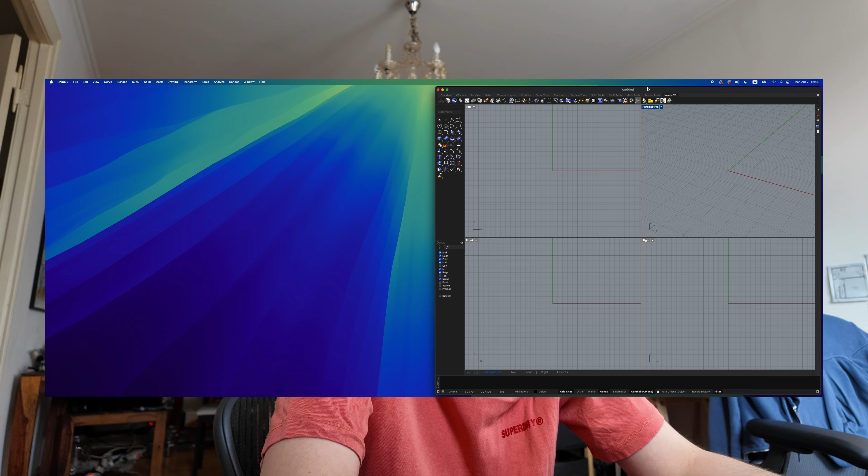The first thing you have to do when using Rhino 3D is create a new model, which will open a new file with 4 windows. Now, I personally don't like to work on 4 windows at once—some people might just use it to inspect different angles of the object. But to get into one single window, you just click maximize, and then you have a single window.

Now there are 2 things to remember in Rhino. It's very simple: with Fusion 360, you draw things usually on a sketch. Here you draw things using polylines. So I can, for example, draw a rectangle. Well, first let me show you what a polyline is. Here I can draw a polyline.

Now, you can bring the polyline into any direction, but if you hold Shift, it's going to try to go at 90-degree angles. I want a box, and before I create this box, I need to know what dimensions I need.

So let's quickly go measure the dimensions of my kitchen drawer and see how big I want my bin to be. I don't want the bin to be longer than 1 drawer, so I want to be able to open up the drawer below the kitchen bin without a problem.

So I need to measure out the height of the drawer, and I need to see how wide the doors are on my kitchen counter. My drawer is 195 tall, so maximum 190-ish. The width doesn't really matter—I can make that the maximum that my printer will do. So let's go.

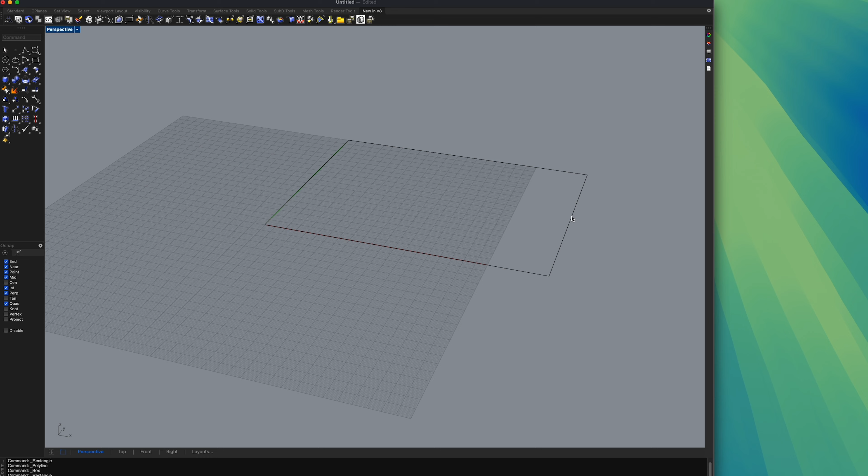On Rhino 3D, to create this object, I can do either a rectangle, which is 250 by 200. Then I just get a rectangle. I can click on it and type in extrude curve. Now I am extruding this curve and creating a three-dimensional box.

Now I need to decide the height, which was 195. So I'm going to type in, to give some tolerance of 5 millimeters, 190. Now this is my kitchen bin's shape.

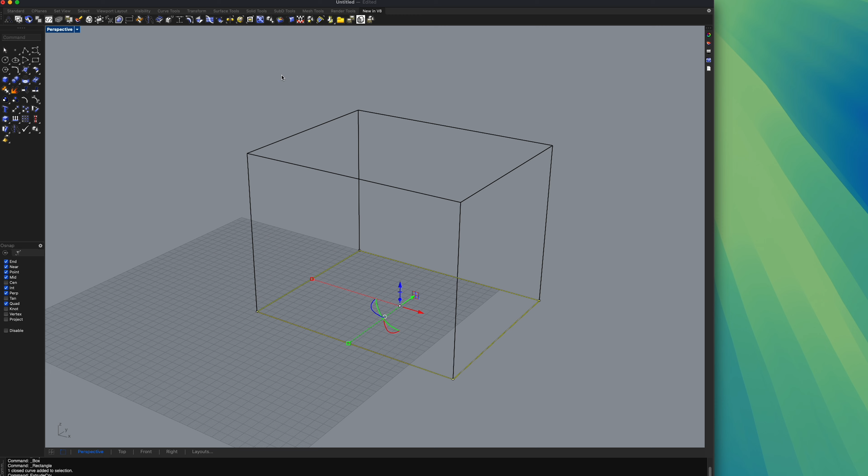As you can see, it's see-through, so if you want it shaded, you can press shaded. This is what it should look like - this is the box and this is the line. You're working with lines that you're drawing and extruding. You can also click onto box, type in 250 by 200, and extrude it by 190, and it would do the exact same thing.

So let's continue working with our shape. Now that I have this box, I need to decide what the wall thickness of my object should be. Usually in 3D printing, anything below 1.5 millimeters of wall thickness is not very sturdy. I usually go with one line being 0.3 millimeters.

If you want some tolerance, 0.3 millimeters is generally a good tolerance to get one line of thickness less, and it will definitely give you enough space between objects so that things can fit into each other and so on and so forth. Now, what I want here is a very strong wall because I don't want my kitchen bin to break.

I have in the past printed it with 1.5 millimeters and that lasted for over half a year, but I will be printing it today with some stronger filament than PLA and I want stronger walls. So I want to use 2 millimeters, maybe even 2.3 millimeter walls to have some very chunky walls.

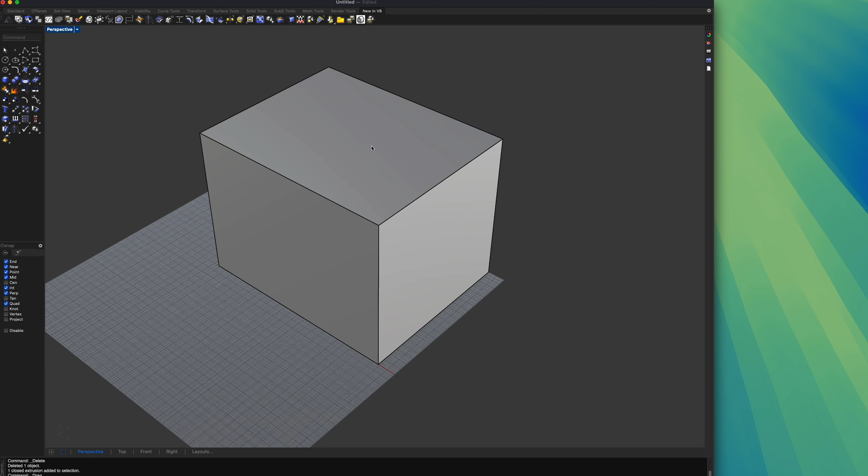So now this is how I can create a hollowed out object in Rhino 3D. This command is almost the same in Fusion 360. Most of these commands are in fact almost the same in Fusion 360.

So what I do in Rhino is I type in shell. Every time I type in a command, up here you can see a window of all other possible commands. I want the shell command, so I'll use that. Rhino makes it much easier to find everything because you just type it in and it's there.

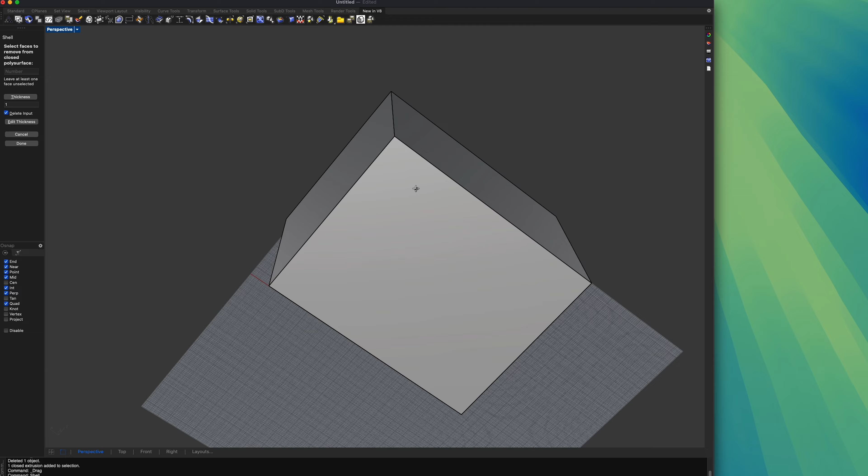So, shell. Now I choose which side I want to shell. I could, for example, shell this front side and this side. Now that would create a tunnel that goes through - as you can see, that's a tunnel. But that's not what I want.

I want a bin. So I type in shell and over here you can see the thickness of the shell. As I mentioned before, I want 2.3 millimeters thickness. So I type in 2.3 over here.

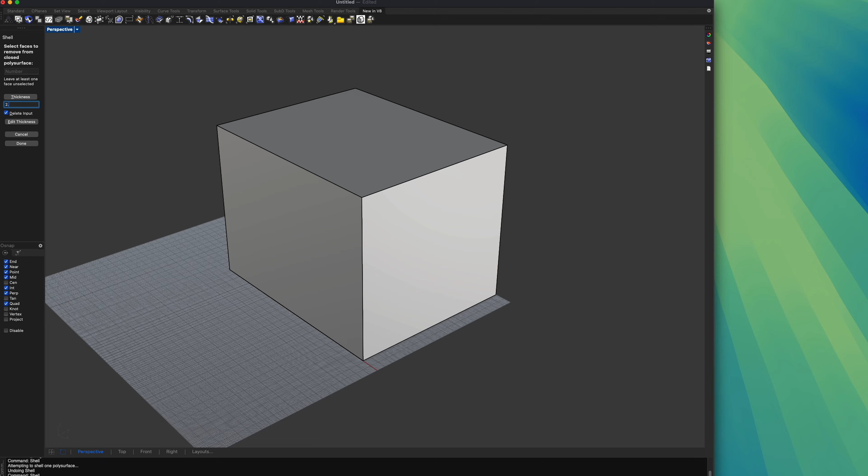Now I decide what side I want to have as the opening - and this is my opening. If I press enter, it will create me a nice box with 2.3 millimeter walls on each side. So enter. There you go.

This is very nice, I like this a lot, but I want to make the design a little bit nicer, so I'm going to round off the edges. Let me go back before I shelled it, because rounding off the edges after I shelled it can cause issues. Let me show you what issues.

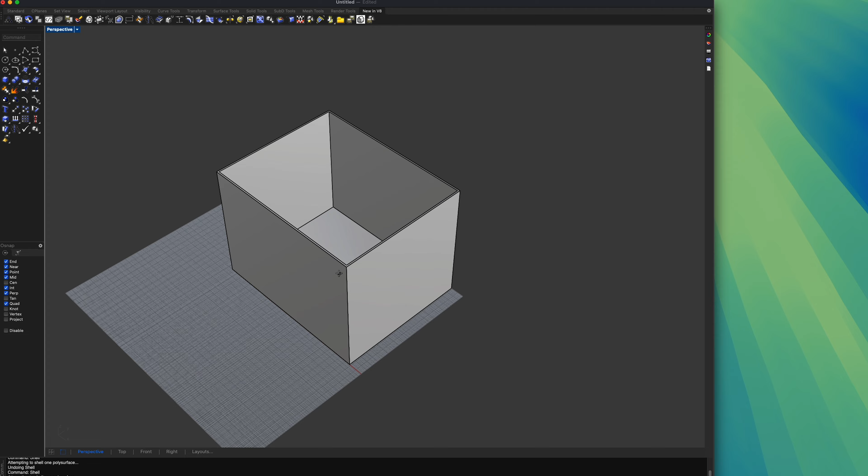So you type in fillet edge to round off the edges, and I want to fillet my edge by 10 millimeters, which will give me a 10 millimeter curve radius. If I fillet this edge, for example, this side will try to go through this area, and you don't want this filleted edge to go into a negative space.

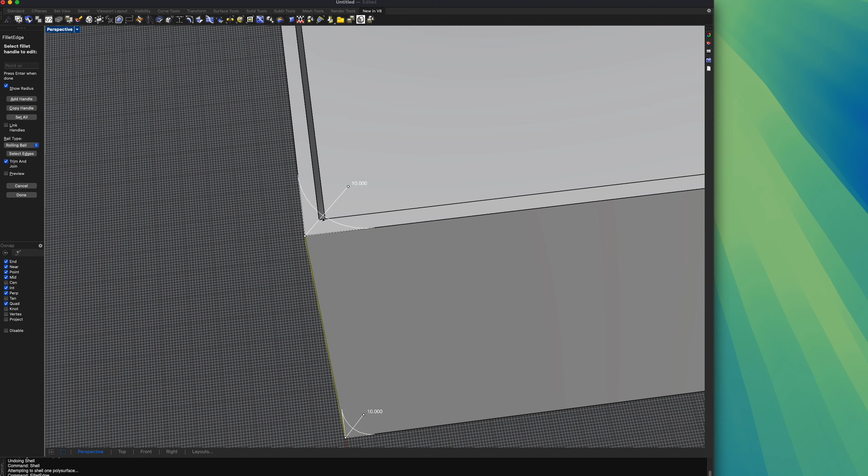You want it always to be solid, so you want some gap to stay here. The only way I could fillet this is by filleting both sides, because now you can see there's a nice line that can fill out like this. But the way I prefer to do it is fillet the edge before. So now I'm back to the beginning.

I didn't shell it yet. Now I can fillet the edge and play around with the shape a bit. I want the back to just be straight because you don't usually see the back, so maybe there's a little fillet of like 4 or something.

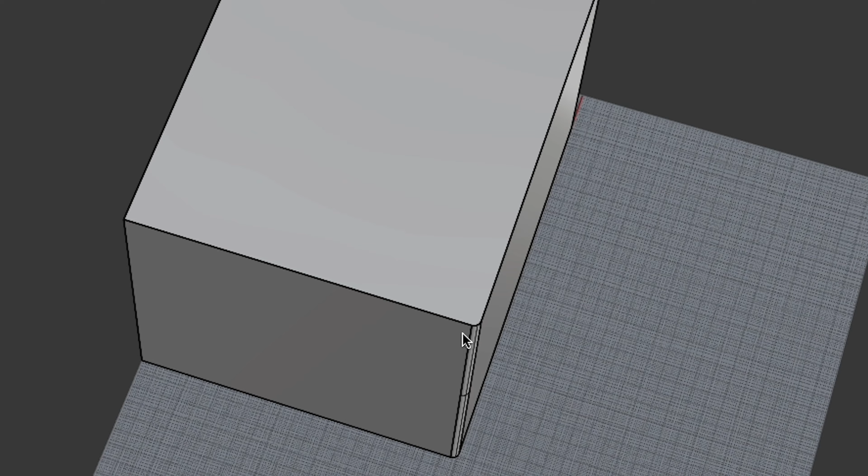This side will be facing the counter, like over here is the counter. Now here I want a big rounded edge because I think it will look nice when you walk by and there's a rounded edge. So I do fillet edge 10. I think this fillet is too small, so I'll do fillet edge 20. There, that looks pretty nice.

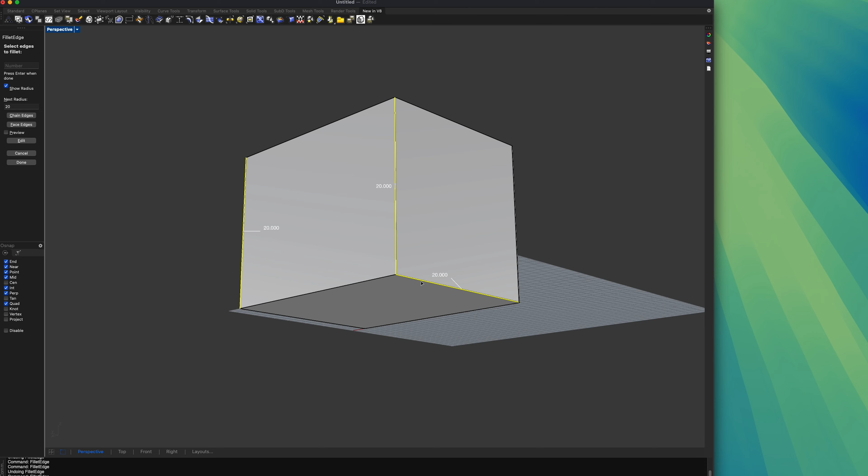Now, one thing we want to make sure is we don't want to fillet these edges, because remember this is 3D printing and you want the bottom to be as flat as possible. If I fillet these edges, well first this doesn't work because I filleted this little piece, but if I fillet these edges, this might look nice to you, but it's not 3D printable because this overhang is greater than 50 degrees and it just cannot print in mid-air. It's going to fall due to gravity. So if you wanted this sort of shape, you would have to chamfer the edges and not fillet the edges.

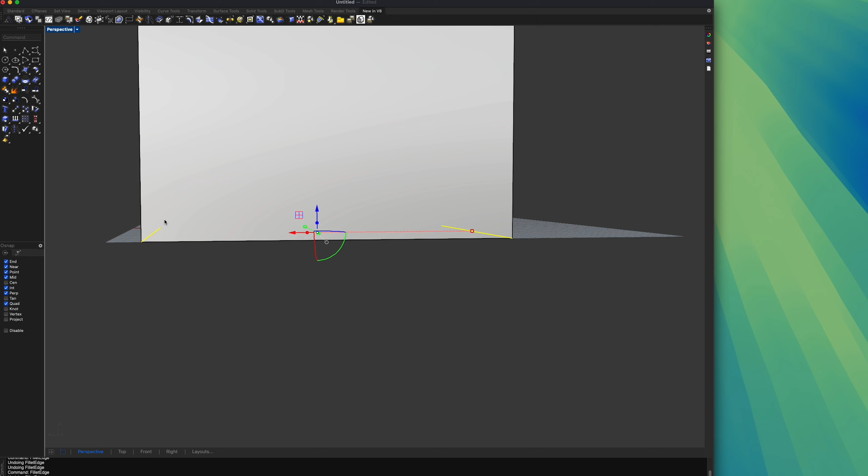You can do this by typing in chamfer edge. Now I could chamfer the edge by 20 and that would give me this. This is 3D printable because here each layer is building up on the last one. Usually overhangs around 45 degrees are still 3D printable, so this would be perfectly 3D printable.

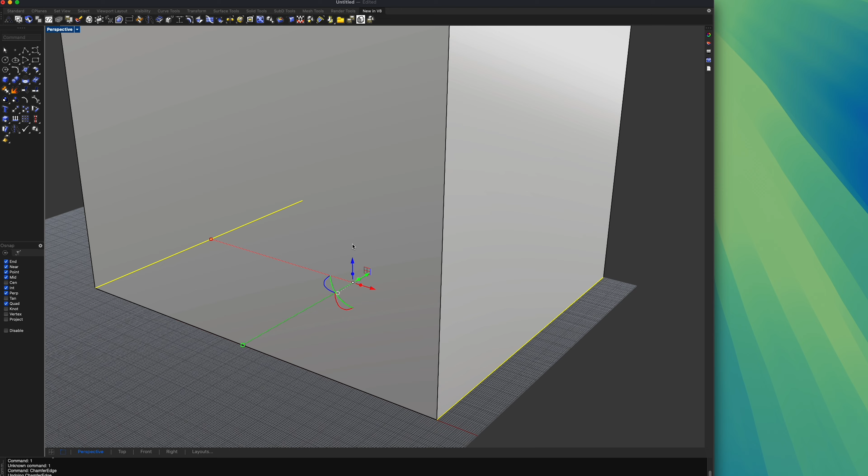Now this is not what I want, so I'm going back to what it was like before. As you can see, a perfectly flat bottom, and the edges over here are not pointy. I'm doing that because if they're pointy, they're more likely to lift off the bed and warp. So that's why I also gave a little rounding on the back side, even though I don't necessarily need it.

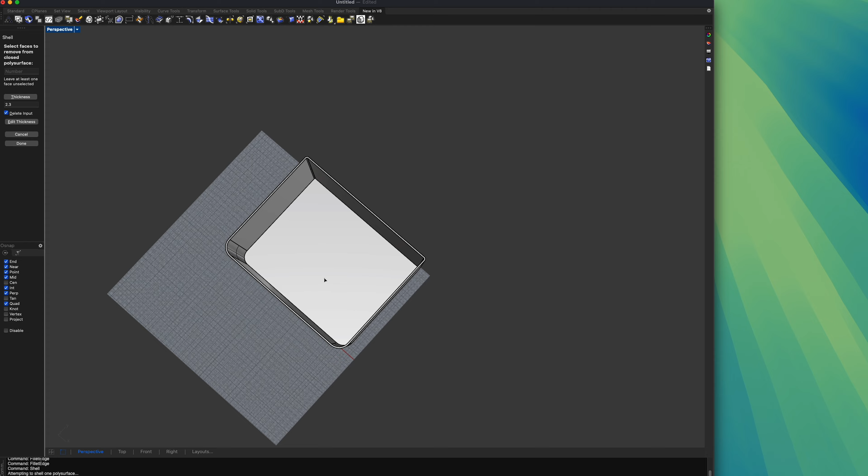Now back to shelling the object. 2.3 millimeters thickness, that should make it nice. In fact, I'm going to make it 2.5 millimeters thickness, chunky. Now, I already created this piece.

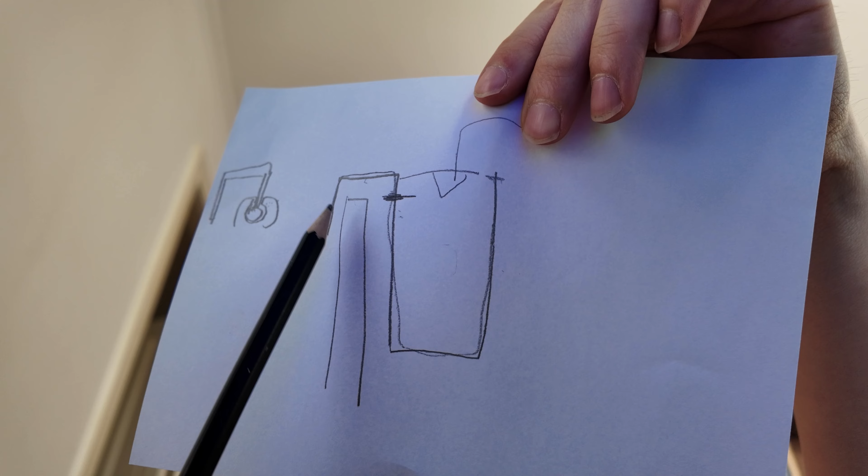Now comes the challenging part: creating this piece and creating the attachment mount. The challenging part about this is creating it in one piece without ever going against gravity. So as I just taught you, you don't want to create rounded edges here because you're going against gravity. Same thing will be when I'm creating an attachment point.

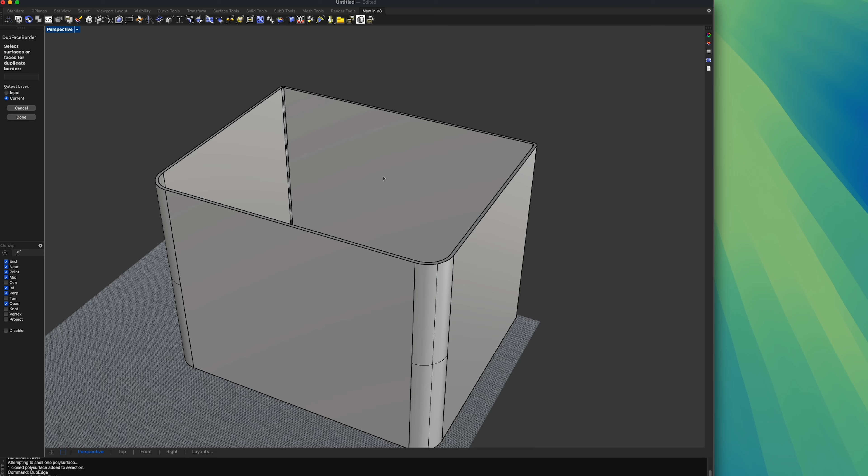I'm going to be creating it on this wall over here. Because it's on this wall and I'm printing it in this direction, anything that comes out here will be going against gravity. So I want to be doing it at a gentle slope, at a gentle angle, so the lines can always build up on each other.

Now, the way I do this is I like to start at the midpoint. I hold shift so it's 90 degrees. Now I can create a line. I personally don't care right now how large this holding piece is for the handle that will go over the door and hold the entire bin's weight, but it should be chunky enough, so let's make it 40 millimeters.

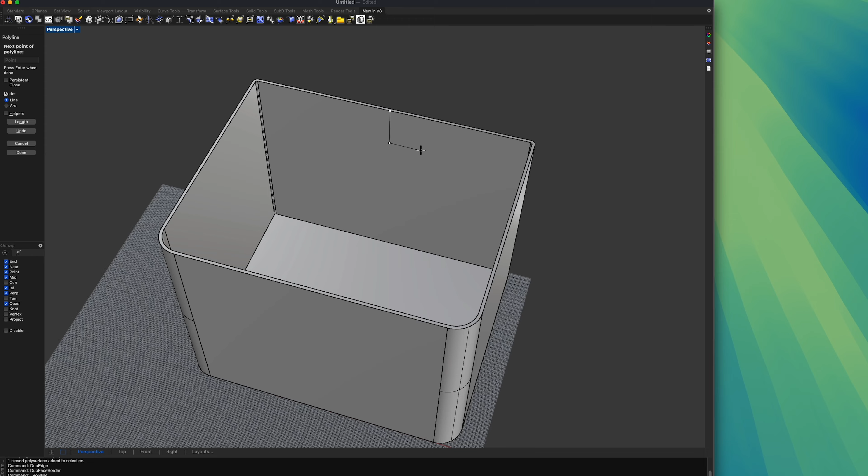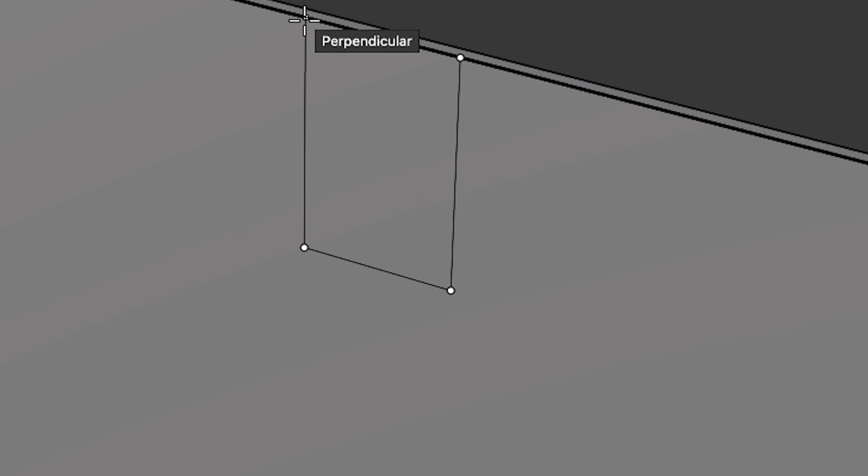Now I have a line that goes straight down. Again, I held shift, so it's 90 degrees. Now I can hold shift again, and it's going 90 degrees in this direction. It doesn't need to be a very big object, so I will do 25 millimeters. Hold shift, and now I can create a perpendicular line, holding shift or not, up to here. Bam, enter. Now I have this object.

Now what I want to do is over here have a mounting area. Whoop, you have to be very careful when drawing these lines because sometimes random things happen. You want a mounting area over here, right?

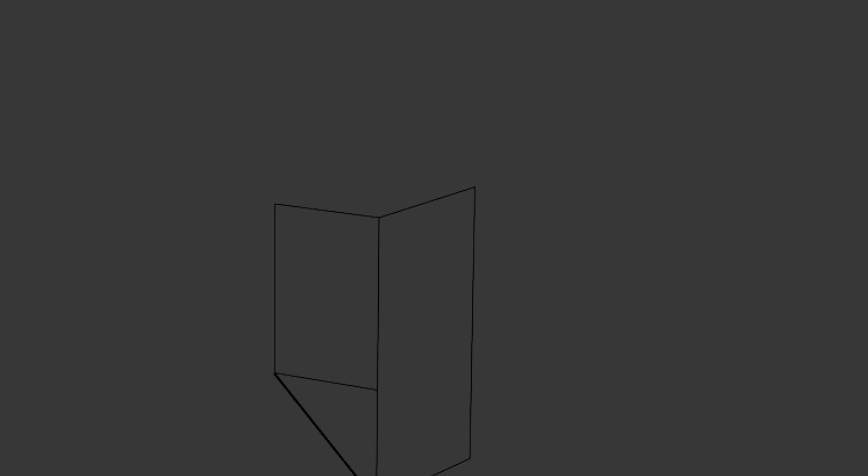Now the problem is this is just hanging out vertically, so this would slope down and fight gravity. So what I want to do is make an internal support. That's why I'm drawing this triangle from here to here, because this can now print again, layer on layer like that. So now I have an object that I can attach to my wall, hang it mid-air, but I don't need supports. What I just did was retrace the outline of this shape so I can extrude it.

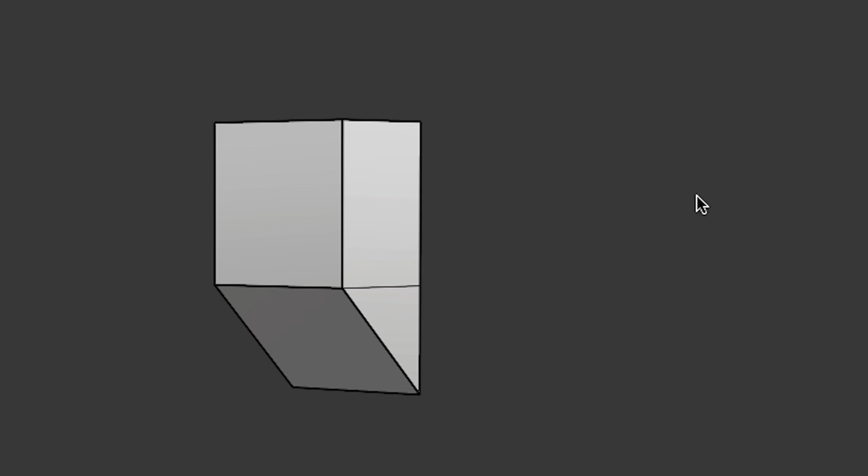So I take the outline, this is the outline of my shape that I just created. Now I can extrude all the way to the end and now I have a shape. You might not yet fully understand why I'm doing this, but I hope you're understanding how to create these shapes, and why I would create a triangle shape instead of just a line that goes out, because gravity would

pull it down. See, there I have my shape. Now this is a nice and chunky shape. And I can now take this shape, and well, before I move it and copy it and do multiples, I'll go back to the shape.

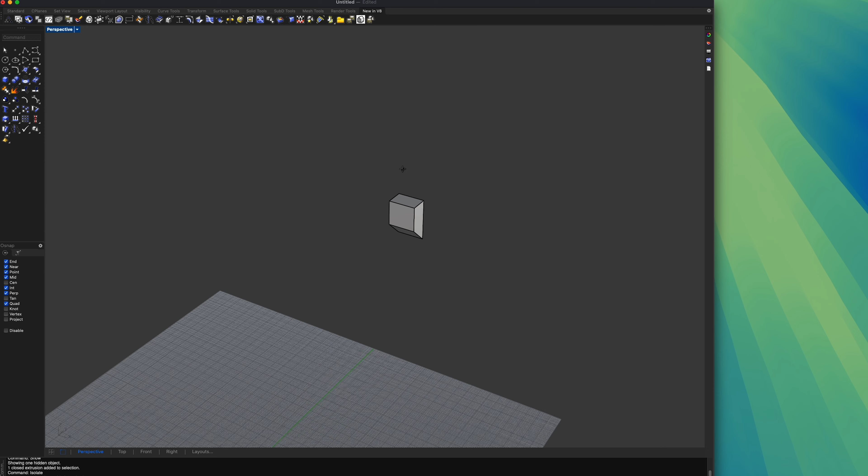Now, as I drew over here, I want an attachment point that is circular. So what I'll do is I'll create a circle. There you go, you can see a circle. I want a relatively big and thick attachment point, so I'm gonna make the circle almost maximum size.

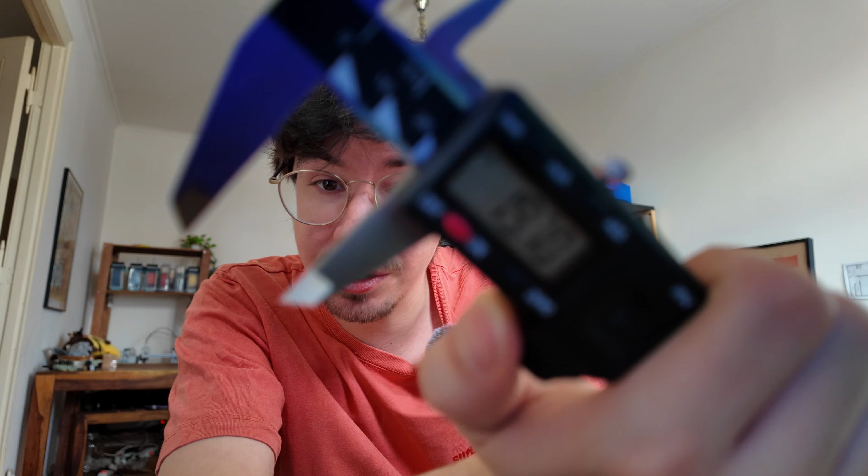Let's quickly look at the size of this. 16 millimeters. So one suggestion from me is, if you're trying to create 3D printed designs, pick up a caliper, then you can accurately view these measurements. 16 millimeters, that's this big.

So now I can see, is this too big? Is this too small? I think this is just the right size to make a chunky attachment point. Now I like this circle size, it's good.

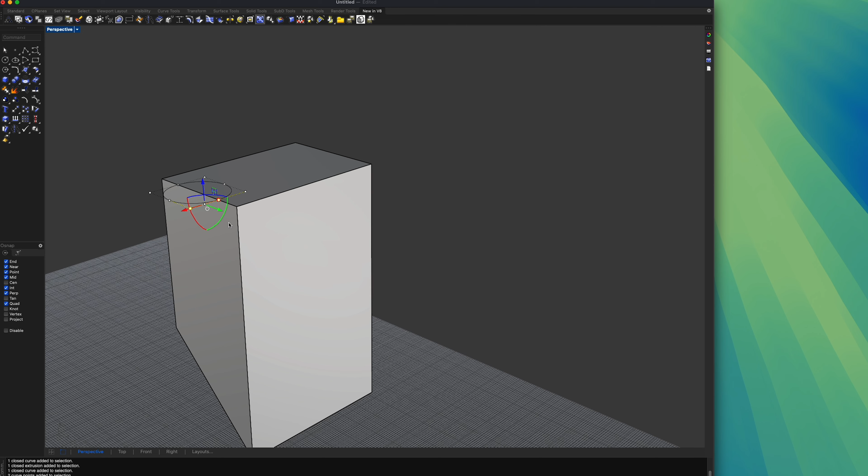Now I can rotate it. How do I rotate it? I press an object and usually these lines come up. I can click it. Now I can see which direction I want to rotate it. I want to take this circle and rotate it so it aligns onto this side. Now I rotate it 90 degrees. There you go. Now you can see they align.

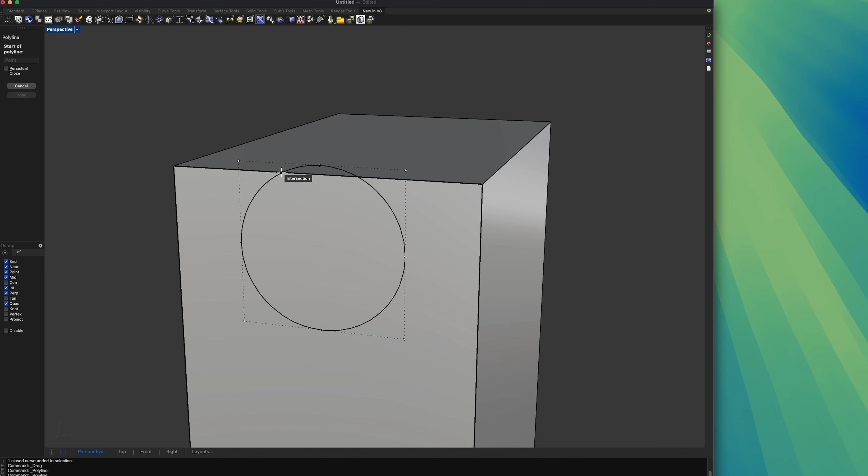I can take the circle and move it down up to here. Here I already have a pretty solid shape, but I don't like these pointy edges. So what I want to do is remove them.

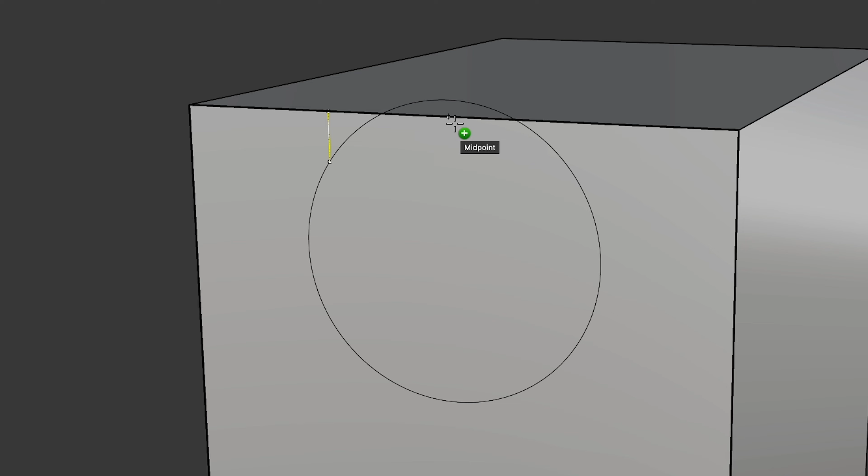Now if I want this on both sides of this object, I can click it and mirror. Now mirror along which axis? This one. Here, this is the midpoint between this and where I want it to be. So again, mirror. Now I can take the push and pull, and I can just select all these surfaces

by holding the control button, I think. My keyboard is mapped a bit differently. Now you guys can see there's a bit more of an edge that is holding the circle.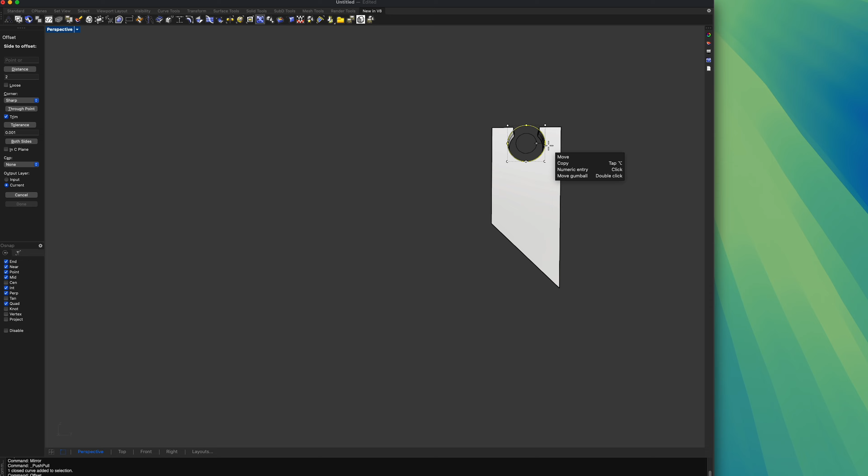I'll show you offset. And now, as I said before, one line is usually 0.3 millimeters. So if I want a tolerance for something to fit through another object, like a circle that fits through another circle, then I need to do 0.3 millimeters, and usually that will be perfectly fine. 0.3 millimeters, and now I can take this.

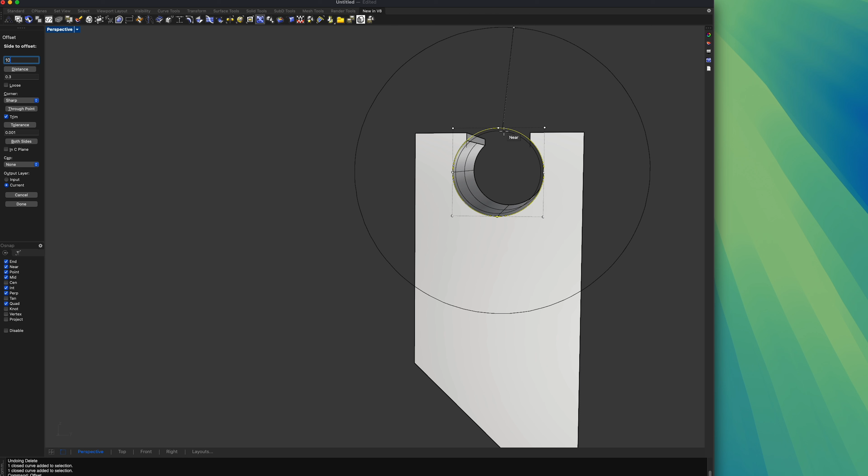So what I just did was I took the circle, and you can offset any shape and make it bigger or smaller. So I'm taking the circle, and for example I can offset it by 10, and now I'm going to have a large circle. You see, a huge circle. Or I could offset it by 10 inwards, but then the circle simply doesn't exist anymore.

What I did was I offset it by 0.3 millimeters, the width of exactly one line in 3D printing, at least with a 0.4 millimeter nozzle, which will give me enough tolerance for one object to fit through another.

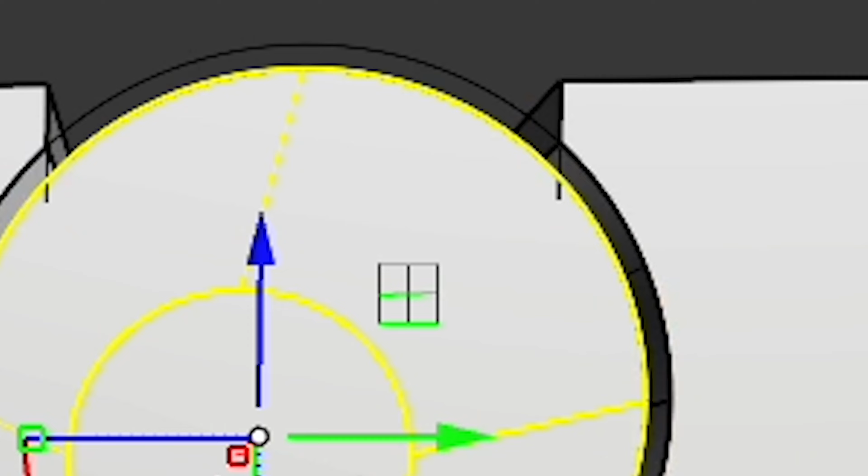Extrude. So now you guys can see, if I would have this circle and stick it through this hole, I could not pull it up anymore because it would collide over here with these edges. So I can now stick the circle in, and I can't pull it up. I can only pull it out in this direction.

So now I can make my hinge that goes over the kitchen counter's door. The hinge goes over the kitchen counter's door and holds the bin down by gravity, by me just pushing the pin through, by me just pushing this through the hole.

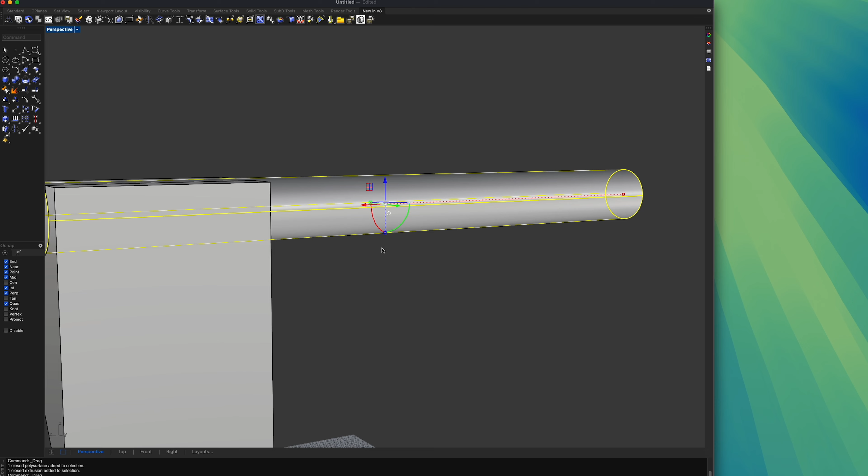Now you might ask, why am I not doing all of this in one piece? There are two reasons for this. The first reason is it's much easier to print complex shapes if you can print them in two separate pieces. In this case, this shape, I can print it very easily, thick and chunky in one shape and quickly by just printing it separate.

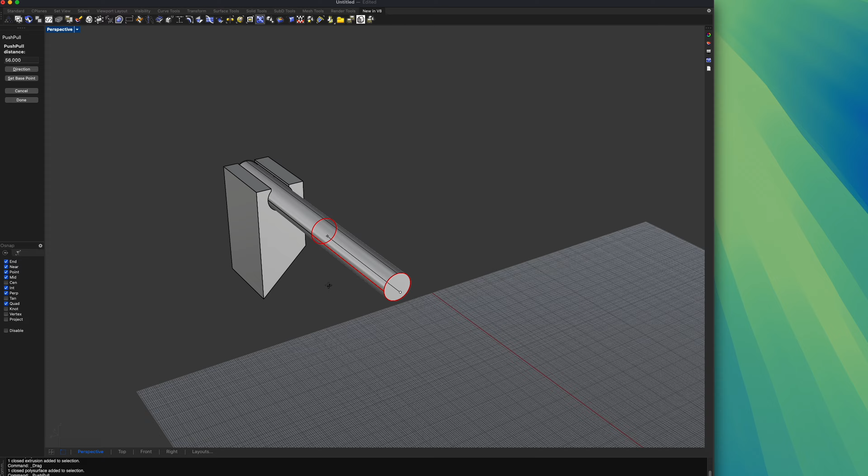Now let's get to finishing off this hinge. So I have this piece of the hinge, and these are now two separate pieces: my tube, and my piece that's attached to the bin. My bin is here, and this thing will be printing together with the bin in one piece. My hinge is a separate piece that I will be printing, and I can just stick it in without gluing, without magnets, without any extra work. I just stick it in and it should hold perfectly.

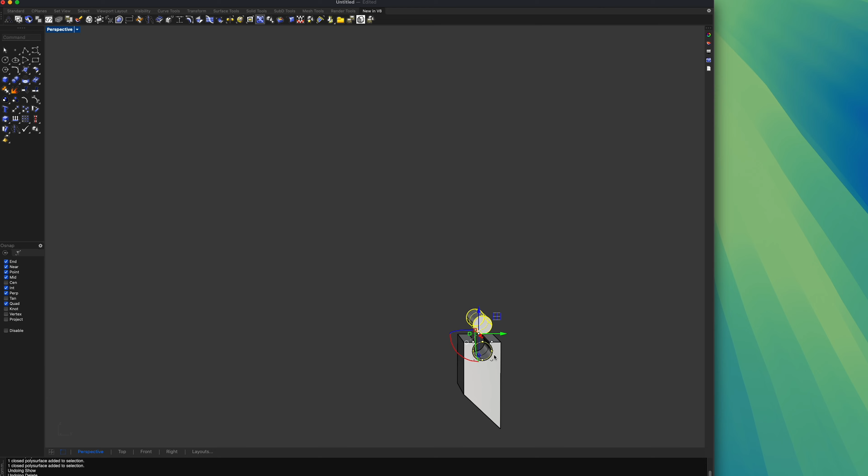So again, here's my hinge. Now what I want is basically this: mirror this along here, take this.

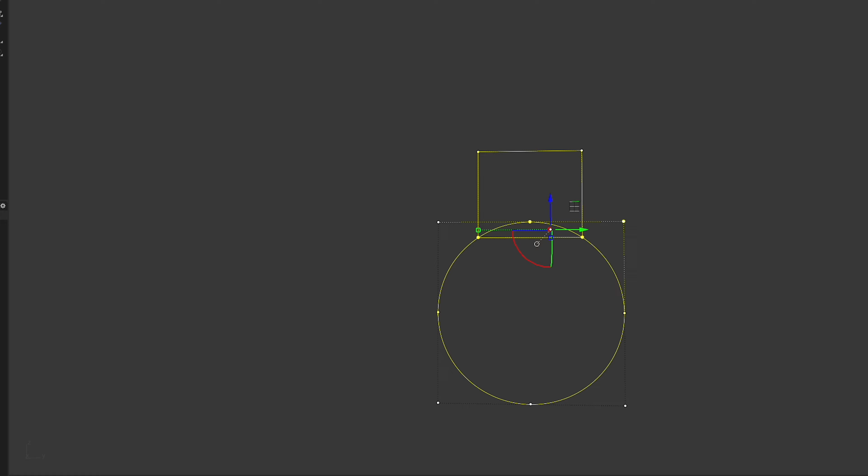Now let me show you how to combine objects so it's not too complicated. I can first type isolate on these two lines, and I want this to be one line. So what I do is select them both and type trim. Now I can trim out the lines I don't want - I don't want this line and I don't want this line. Now I press enter and this is my final object.

Now they are all individual pieces, so I want to join them. I press join, type in join. Boom. Now this is one nice smooth line that I can extrude.

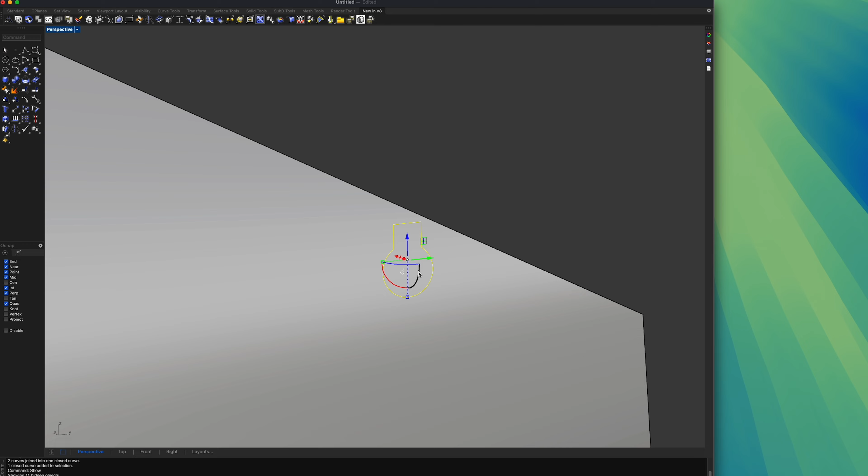So, by the way, if you highlight objects and type in hide, they hide. And if you type in show, everything shows again. So, hide - now I can work on this.

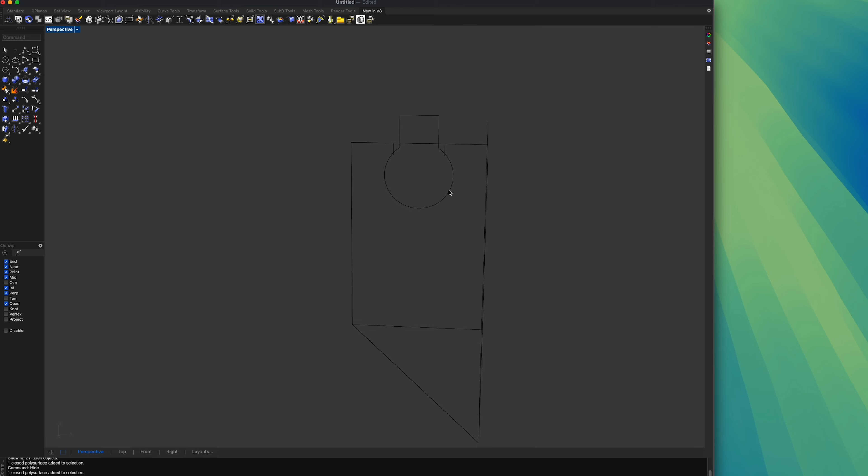I can hide this. This is one of the big reasons why I prefer Rhino to Fusion 360, because Fusion 360's interface is in my face and clunky, and here I can just, with one command, hide, show. I know it's possible in Fusion 360, but is it that easy? If it is, tell me.

Now I can extrude this piece, and done. Now what I really want is my hinge to go over here. The maximum thickness I want for my hinge is 5 millimeters, I believe.

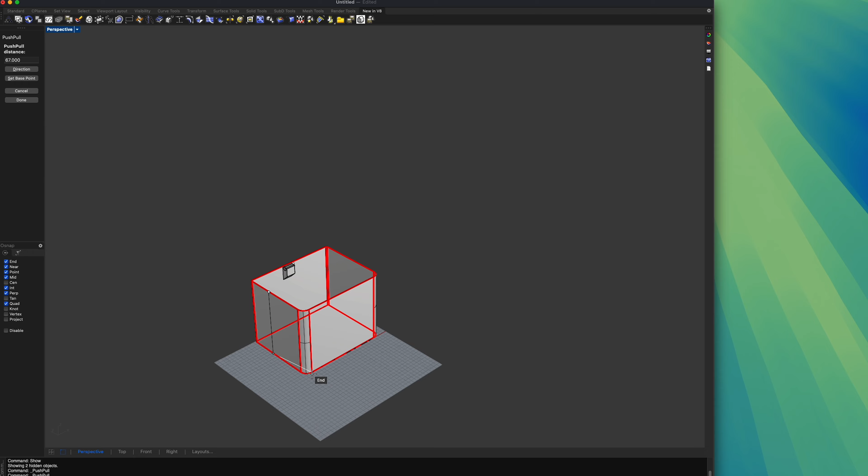Or wait, it's a question. I think I left 5 millimeters of space before, so I made it 190 exactly. You guys can see it's 190. So this thing can be 5 millimeters tall.

So what I want to do is press it and pull. I can now pull it down and I can see it's 3.46 already. So 5 minus 3.46 is equal to 1.56 - so 1.56, and I will add it. Now this is exactly 5 millimeters.

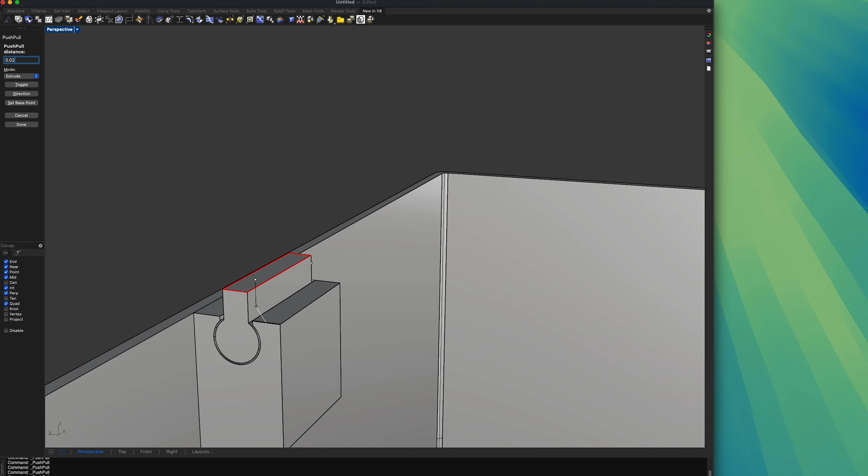My math was off by 0.02. I pull it down, now it's exactly 5 millimeters.

So this is the final height I want, and all I want to do is take this thing, make a line, and move it down by the threshold I like to keep, 0.3 millimeters. So 5 millimeters minus 0.3, move it down by 4.7 millimeters. Now that I have this line on the surface, I can push and pull it.

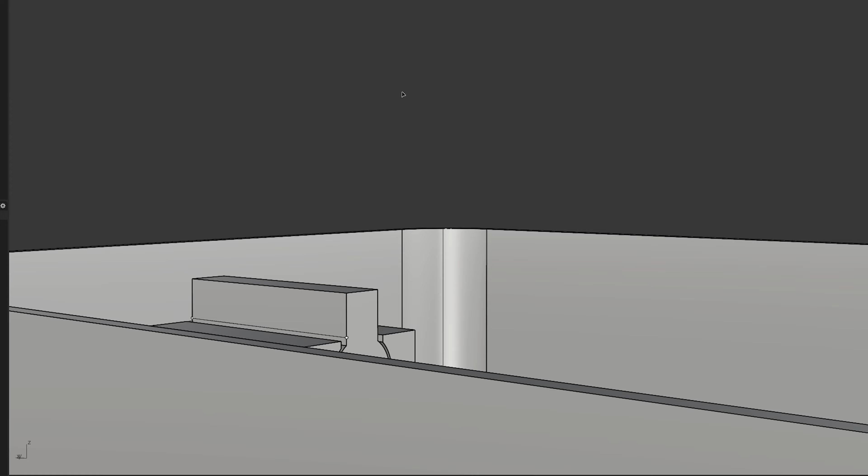So I will first push and pull it to the same distance. As you can see, there's a nice thing here.

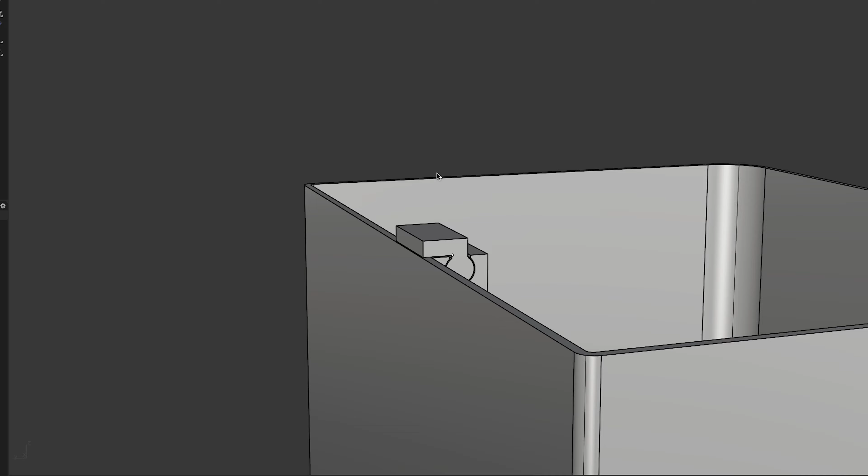Now, the next step is I need to know the depth of my door. The door is 2 centimeters, 20 millimeters. Yes, I know for you Americans this video is awful - I'm sorry, but it is the way it is. So we do 20, and as you guys can see, it's flush right now. So 20 millimeters - now we are at the end of the door. Now we want to go down.

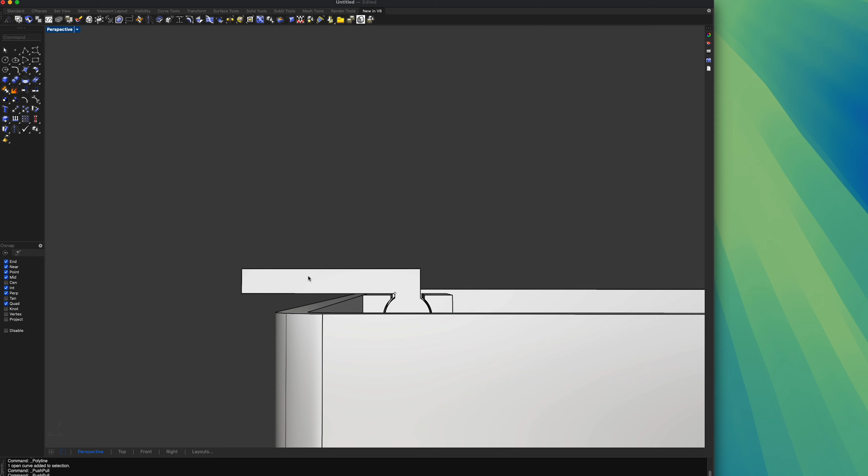Another important thing is this piece - it's not allowed to be wider than the gap between the drawer and the top of the counter. So I need to check what that is. Yeah, it's maximum 5 millimeters. I think 4.5 millimeters is safer.

This is another reason why I need 2 separate materials, because 4.5 millimeters is not a lot, so this material needs to be very strong. So we're at 4.7, 4.5.

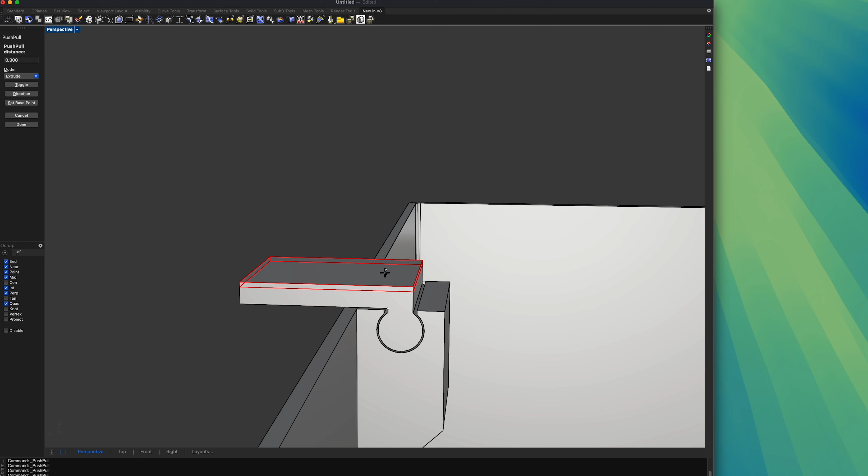All right, we're gonna do 0.3 less, so we're gonna do 4.4, give it a little bit of tolerance. You know what? No - 0.4 less, 4 millimeters. It is what it is.

It's all I can offer. So this piece should now fit through the slit of the door and be able to go to the back. This is the right length.

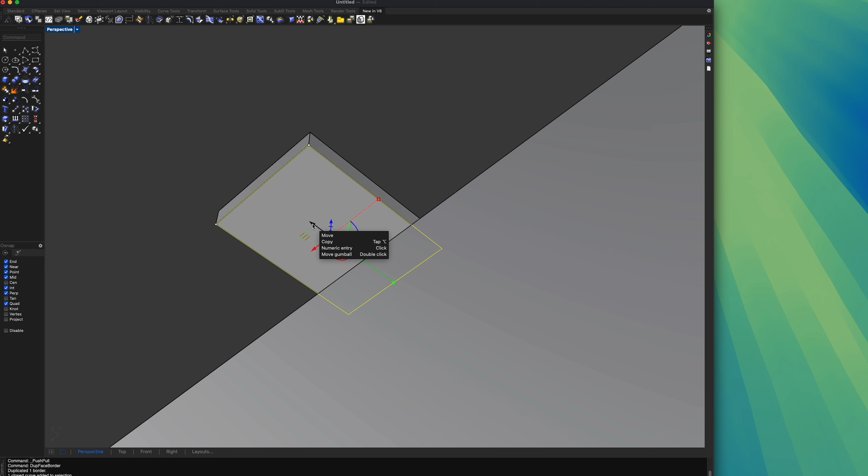So all I want now is just to create a box. You know what, I'm gonna do 5 millimeters extra. I will dupe this line and move it by minus 4.5 to give it some tolerance. I like to always give everywhere some tolerance, so tolerance towards the end of the door.

And I'm gonna pull this down by, I actually do not care how much. There, that's it. As you guys can see now, this thing should be able to attach to the back of the door, no problem. These hinges, how small they are.

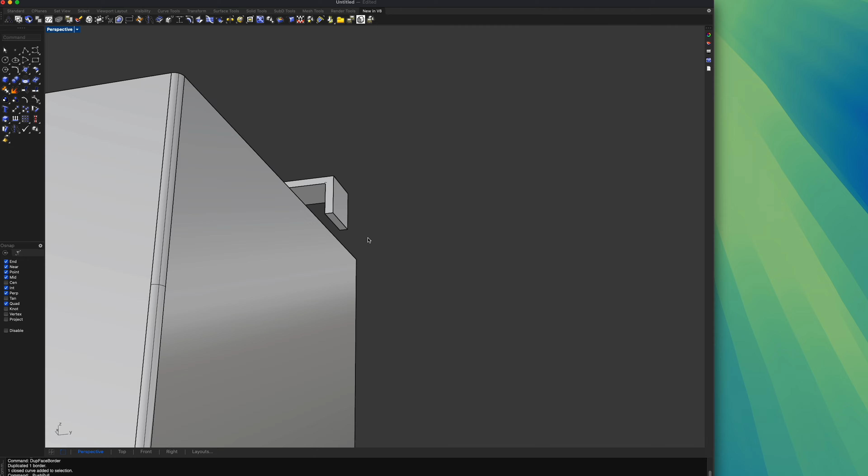Very small, these are very easy to print. You can just print them. As you can see, there's a flat piece here. This is where they're gonna lie on this face, so it's going to be standing up on this face. Nothing will be hanging, see, this is how it's going to be standing. So nothing will be hanging because of gravity. It's just print in one piece, very easy.

You can print it with any material, which is important because this piece will be printed in a strong material, in a very strong material.

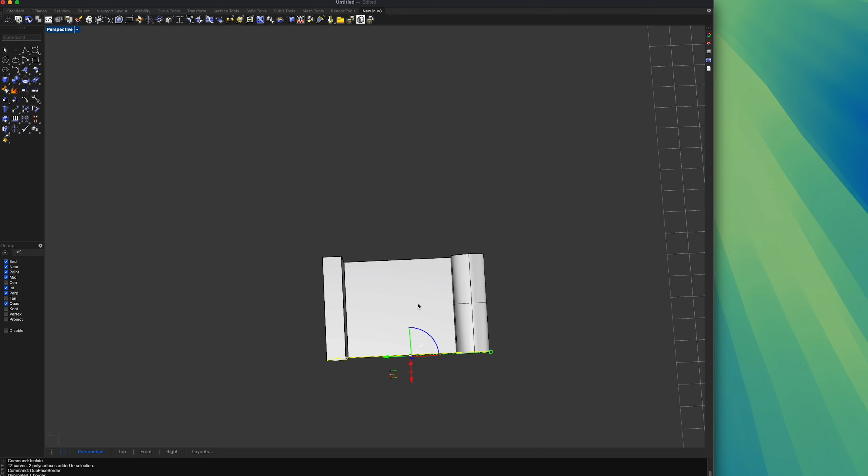Now, I don't think one of these hinges is enough, so what I want to do is create multiple. But before I create multiple, like always, I want to make the hinges look a little bit prettier, a little bit nicer. So I will isolate these pieces and do some chamfering and some filleting.

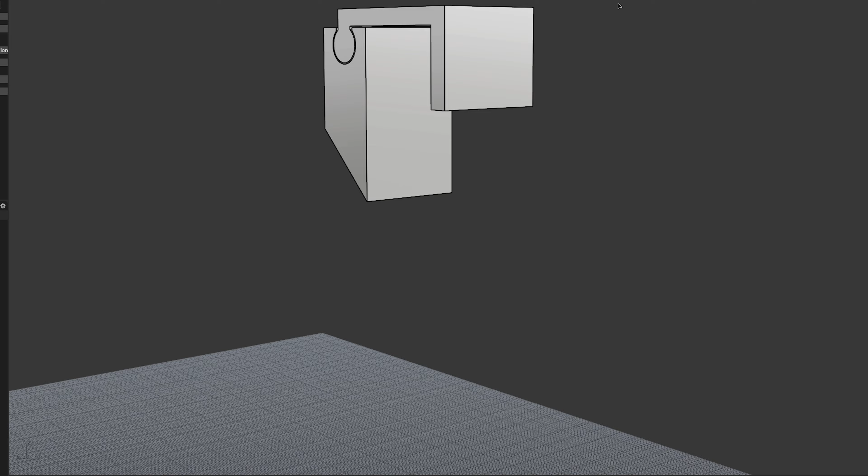So let's start with filleting some edges. I want to fillet this piece over here by 3. This one is nicely filleted. It can now slip more easily under the counter because it will go in and out and in and out. So if it's going down, it will more easily slip in.

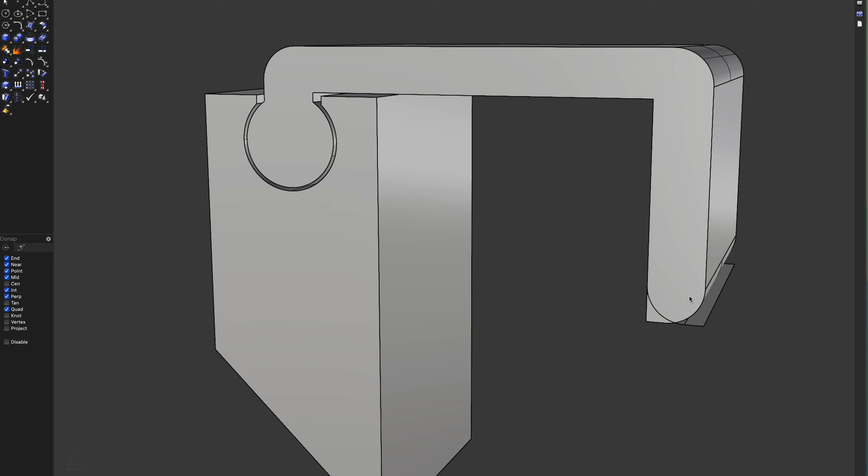Now I can also fillet this piece. I could fillet these 2 pieces. See, I cannot fillet them more than the distance. I'll show you, this distance is 4.5. So if I fillet them more than half of this distance, they will overlap, so you want to only fillet them to the half maximum. So what I want to do is 4.5 divided by 2.

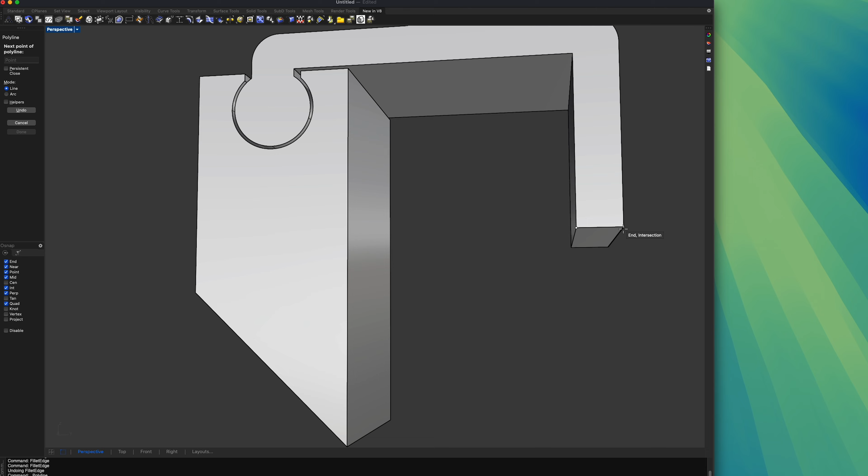I want to leave a little bit of space, so let's say 4.4 divided by 2 is 2.2. Now I want to fillet them by 2.2. Smooth, it's smooth. And then I want to fillet this piece too, but not by much, honestly by very little. So I will fillet this piece by 1 there. So now I got a nice rounded piece.

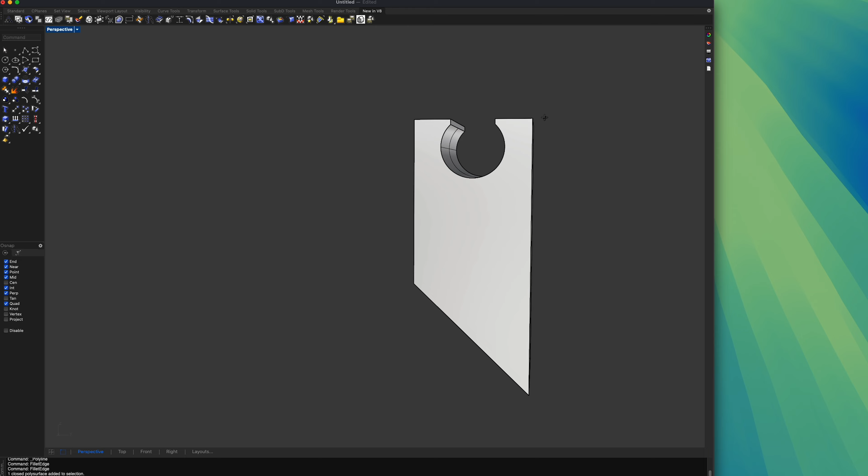Now I can hide this piece because it's no longer relevant. Now this piece is the next piece that's relevant. Everything should print fine. This piece is flat on the wall, so maybe I can fillet this edge. A small amount of fillet wouldn't make much of a difference. And I can fillet this edge over here.

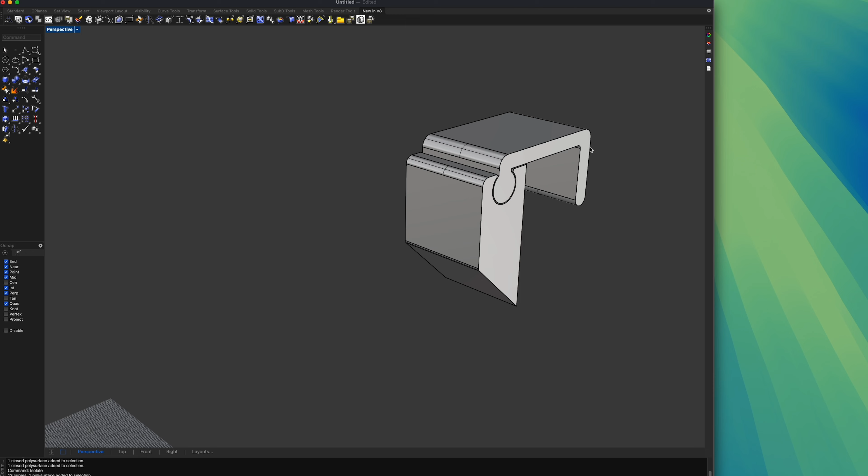Aside from this, I don't have a problem with how it looks, but I want to do one last thing so that these hinges are good quality. The problem is I don't want the hinge to slide in or slide out, so I want a way for the hinge to kind of hit a barrier at least, so you can slide it to an end point and it won't slide much further.

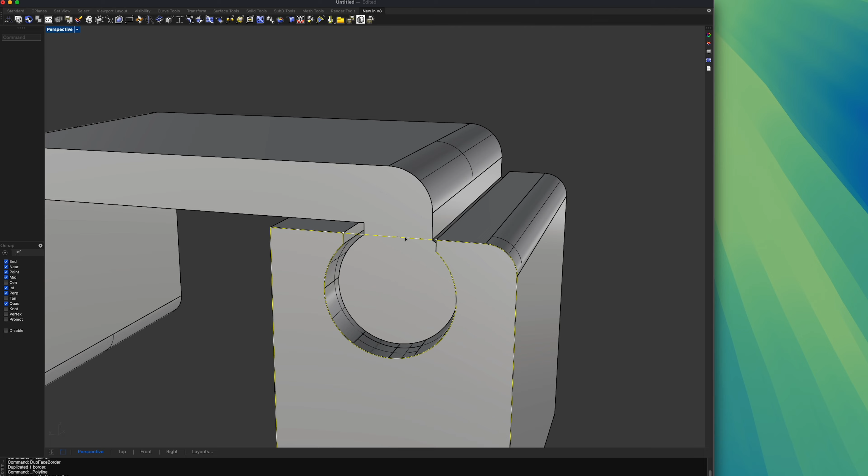So I'm gonna add 2 millimeters to one side of the hinge. I'm gonna dupe this face, add a line here, then select that line, isolate, and then trim. Now join, now show. Now I can take this and extrude it by 2 millimeters.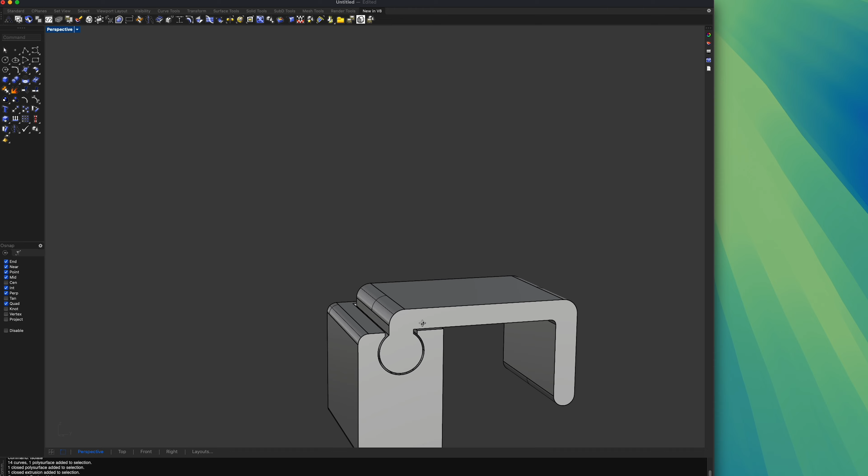There. Now I can just take these 3 objects, isolate them. Now I want these 2 objects to be one object, not this hinge, only these 2. So I Boolean union them. Boolean union just turns everything I selected into one object. So boom, Boolean union.

And now I have one nice clean object with a dead end, so I cannot push this further. I could now do other things to keep the hinges in place, but in my experience, I don't need to. They'd stay in place by themselves. The only time they would maybe fall out is if you take the kitchen bin off and shake it to get the trash out, but you shouldn't be doing that anyway.

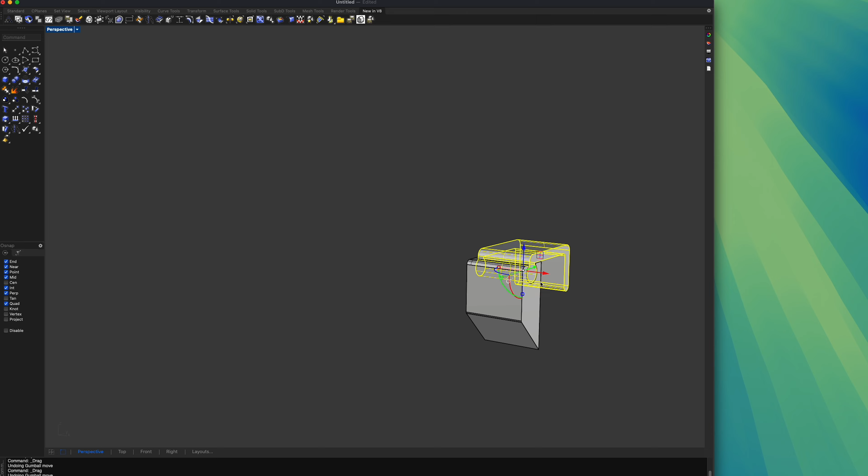Anyways, so this has a dead stop. It can't move up, it can't move in this direction. It can only move in and out in this direction, which is exactly what we want. Easy to put together, easy to print.

Now I can make multiple copies of this, and that's basically what I'm going to do. I want to take one here and mirror it. Where do I want to mirror it? Along the center of this trash can. So now you can see I have one on each side.

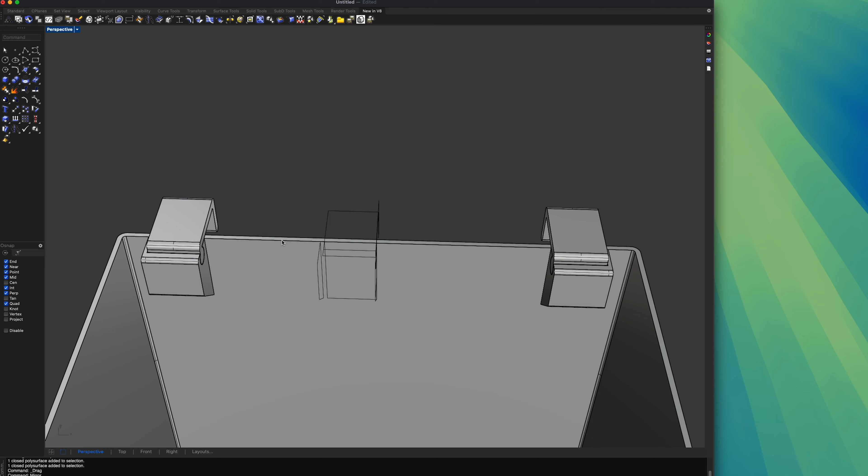And then I also want to take one and move it. Move it from here to... no, that's mirror. I'll move it from here to... okay, this will be easier if I clean this thing up a bit. So let me hide everything I want to keep and delete the rest.

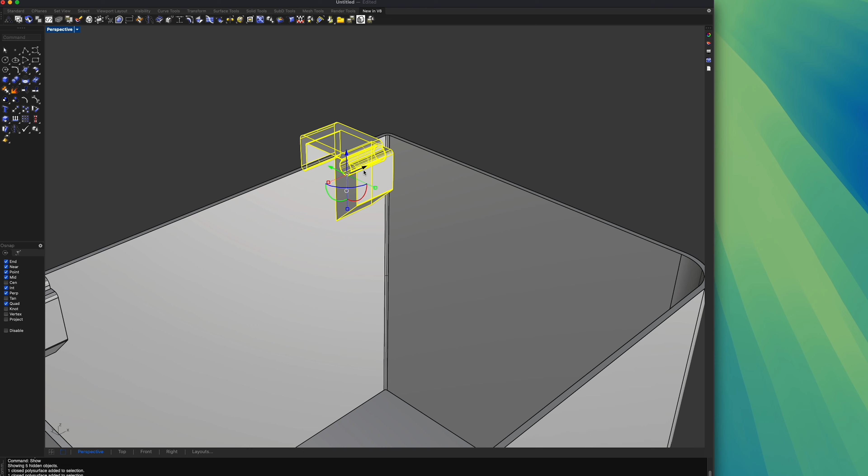When I move, I select from where I move it. Here I want to move it from the center of the object so I can perfectly move it to the center of the trash. Center of the object and center of the trash.

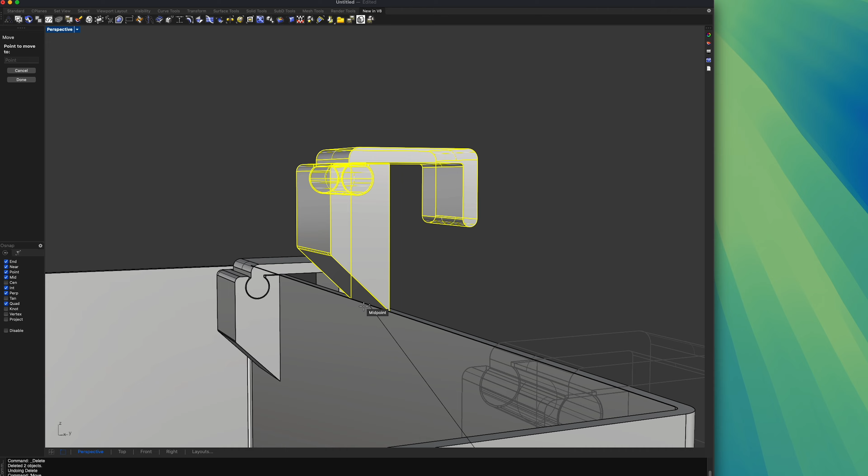Now I need to make sure it's on this side of the wall and not on this side. So I will move it until I see the midpoint. There's the midpoint. And now I can take it and type in move, but click Vertical, so I can move it from the same position but to the vertical position of this. Now they're at the exact same position.

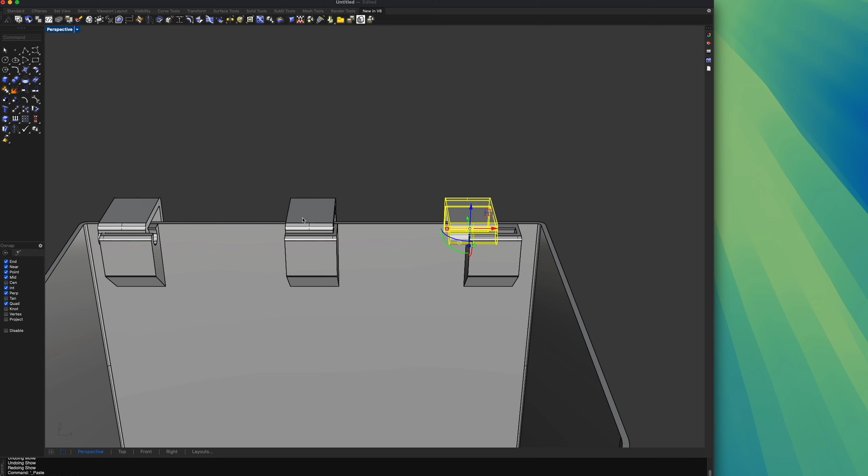So now I have 3 hinges. One slides in from here, one slides in from here. Remember, when you mirror, the object itself mirrors as well. And one slides in from here. So all I need to do is print 3 of these and 1 of these baskets, and I have my kitchen bin.

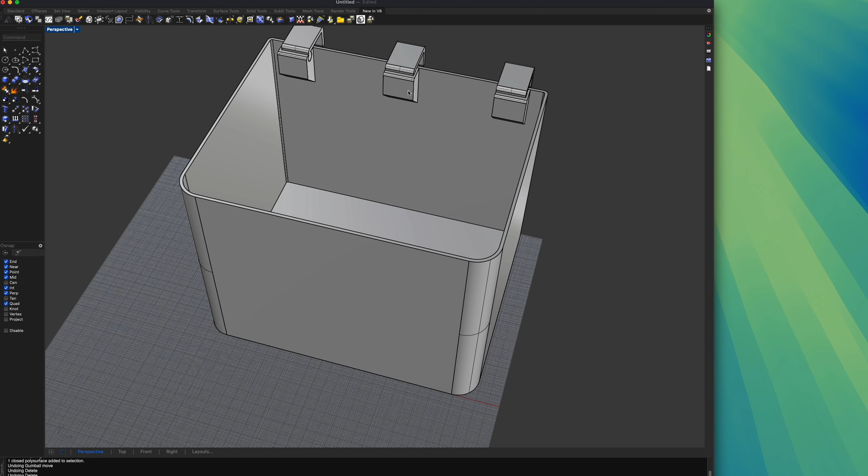The only thing else I would like to add to my kitchen bin is make it a little prettier. I want to make the kitchen bin blue, but add some extra accessories. Since printing in multiple colors takes a lot of time, I'm just going to add accessories that you can glue on, but you could also maybe make them slide on. What I want is a blue bin with some nice brown lines on the front and on the side. So how would those brown lines look?

I would take a little box, they don't need to be big, just some lines like this, but I want them to be indented. So sort of like this, right? So this whole bin is blue, but there are brown lines going on the outside like this.

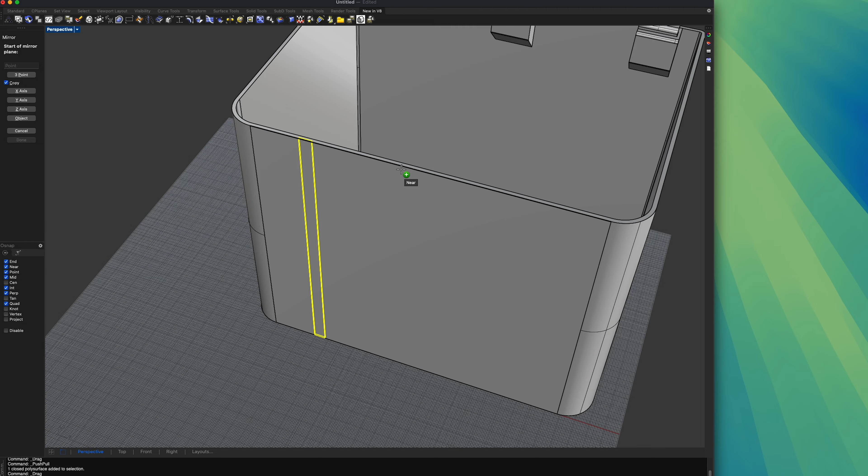So how I do that is I will mirror this one, and I have another one. I'll take this line, make a copy and move it out, rotate it by 90 degrees, and then move it from this top corner to this line. There, now you can see it's on this wall, and I want to make a second one. This one doesn't need any math or anything behind it, just some fancy lines basically.

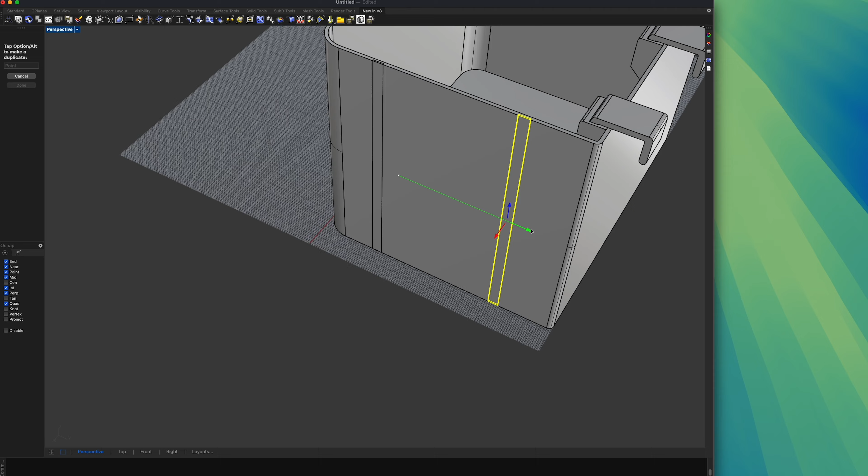Maybe I'll mirror it so it's even. That's it. And now I can take these two, and mirror them along the center of this, and now I have lines on all sides.

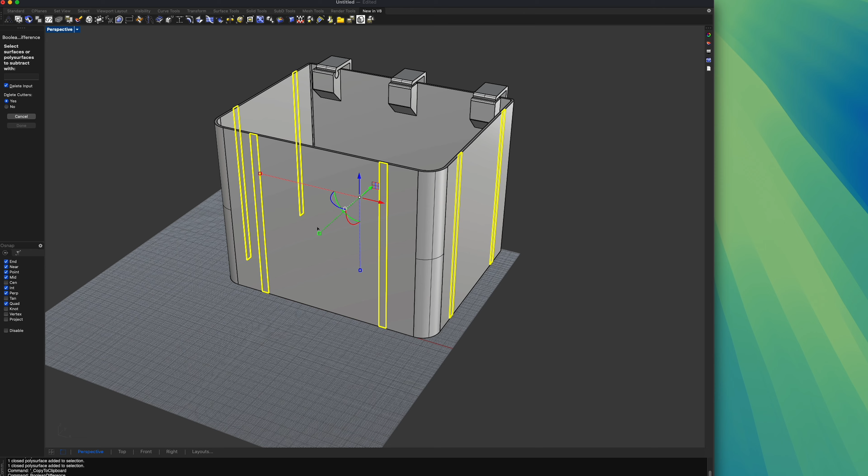Okay, so now I want to take these lines, copy them, and type in Boolean difference. I want to take these lines out of the geometry of the bins. So I want to copy all of these things, take this, type in Boolean difference, and select all of the sides. Now you can see they are cut out. You can paste them back.

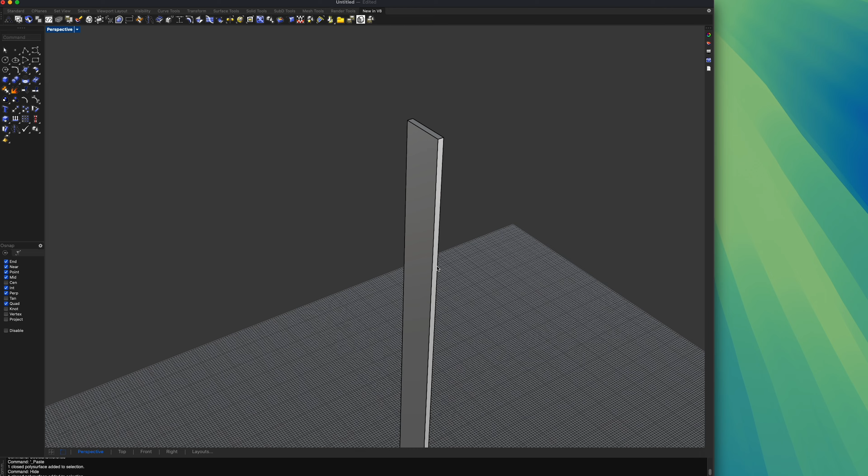Now what I want to do is, since they're the same size, I will just add tolerance to it, a little bit of tolerance, 0.3 millimeters to each side, to make it a little bit thinner. And that's it, that's my kitchen bin: 4 stripes, hinges, and everything else.

I hope this video could give you some tips and tricks. And now let's get to printing, and let's show you guys the results and the function of my kitchen bin.